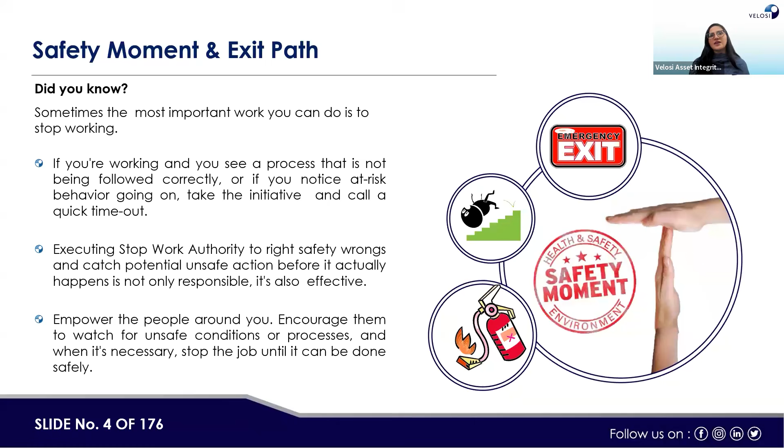So before we begin, like usual, we will have a safety moment. Although most of us are in the comfort zone of our homes, we should be aware of emergency exits, keep a safe distance, and generally take care of those who are around us and also of ourselves.

So covering the agenda, since this is quite a technical subject, we will touch only the key theoretical and practical aspects of conducting fire and explosion risk assessment, FERA study, for oil and gas facilities. In this limited two hours, we request you all to follow along with us and keep asking questions to help us make this session as engaging as possible.

So let's begin, I'll start with Velosi's introduction, a brief intro and overview of what we do. Velosi is a leading global consultancy firm that provides asset integrity, HSE engineering, and software development services to clients in the oil and gas, energy, power, and petrochemical industries around the world.

We also have our in-house proprietary software, Whale Plant, an industry-leading SAP-certified complete asset integrity solution software, currently being utilized by oil and gas giants such as ADNOC, Dragon Oil, TANUP, BSR, etc. Founded in 1982 in Malaysia, Velosi Group was then acquired by Applus Spain in 2011. With above 43 years of experience, we have expanded our footprints in more than 86 countries so far, offering a full range of specialized consultancy services tailored to the energy industry needs. Here is a map that shows our worldwide existence.

Assalamu alaikum, good day everyone. This is afternoon, almost 2:15 here in Abu Dhabi, and I know it's a late evening in the Far East, Malaysia, and morning hours in Europe. So many people are attending in various parts of the globe.

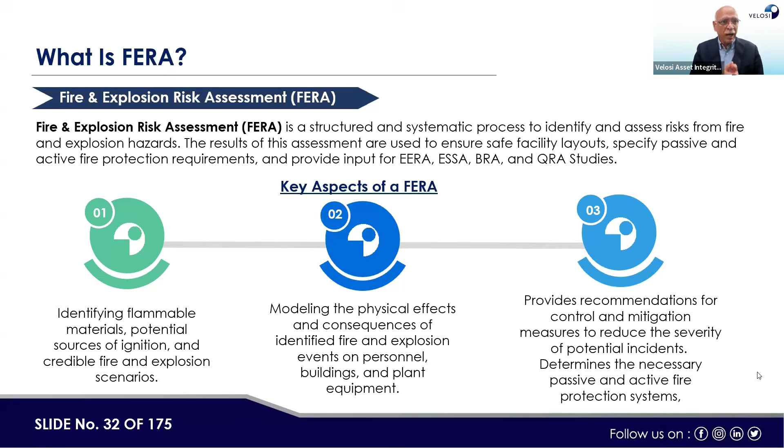Once you have output, it provides recommendations and mitigation measures on how we can minimize risk. We cannot eliminate fire and explosion risk entirely. Once you are dealing with hydrocarbons, they can burn, which requires three things: hydrocarbon, oxygen, which comes from air, and the third element, which is the ignition source. If an ignition source comes near hydrocarbons once they are released, it can cause fire, and fire can convert into an explosion. This is a real risk for us, and we need to manage it.

Now, in a normal aspect, why it's important and how we do it: hazard identification is important. Then assessment, how big is the impact, then how we can reduce the risk, what protection measures we can take, and how we can further improve. All these aspects are important.

Why is fire and explosion risk assessment important? Two examples I gave in the beginning: one fire in Chevron refinery in California, America, during the first week of October, and second, a fire that took place in the Dumai refinery of Pertamina. That is also another example, a reminder for us that this risk is real.

Another example: in the Gulf of Mexico, there was a rig, there was a blowout, and that blowout caused a big release of hydrocarbons, and there were 11 casualties. Now, why did it happen, and how could it have been prevented by a good FERA implementation?

There were poor well integrity checks. Then there was poor blowout preventer maintenance. Then there were gas leakages, and there were ignored signals or alarms by the operators.

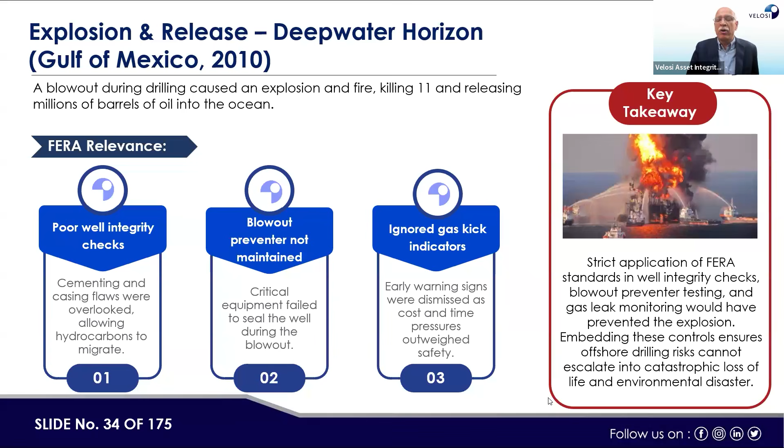So what's the outcome from our presentation point of view? A strict application of FERA standard in well integrity checks, blowout prevention, preventer testing, and gas leak monitoring would have prevented the explosion. Embedding these controls ensures offshore drilling risks cannot escalate into a catastrophic loss of containment or affect life and property.

Another explosion took place in China, Tianjin, in 2015, where ammonium nitrate and chemicals caused a massive explosion, killing 170 people, and there was damage to thousands of buildings.

So what were the causes there? Unsafe storage practices, poor segregation of chemicals, and ineffective audits. FERA also gives recommendations that there should be proper segregation and storage rules which should be followed, and segregation is mandatory. It should also be checked if all chemical storage handling procedures are being followed strictly. So FERA provides guidelines with those respects.

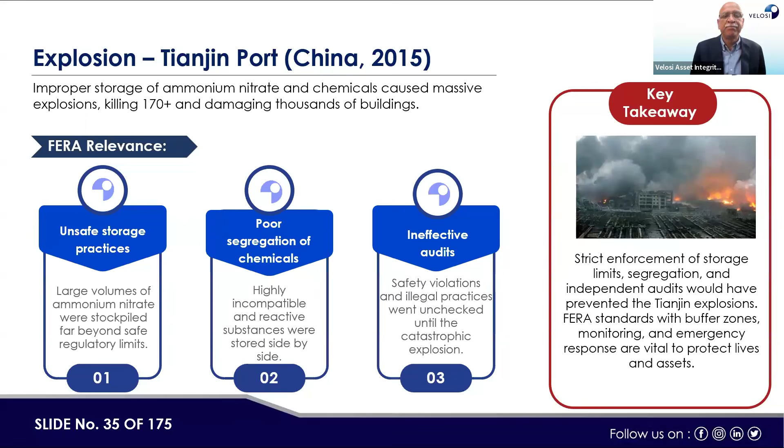Piper Alpha is a notorious incident which occurred in the North Sea in 1988, which caused the deaths of 167 people, and the full platform was also lost. As a result, the concept of the safety case was implemented or initiated by HSE UK.

In this case, the permit to work system was weak. Then isolation was also weak—there was a valve removed, but the process was started despite that. Evacuation systems were also weak. All these aspects could be fairly improved if FERA studies are done and the recommendations are implemented as a serious effort.

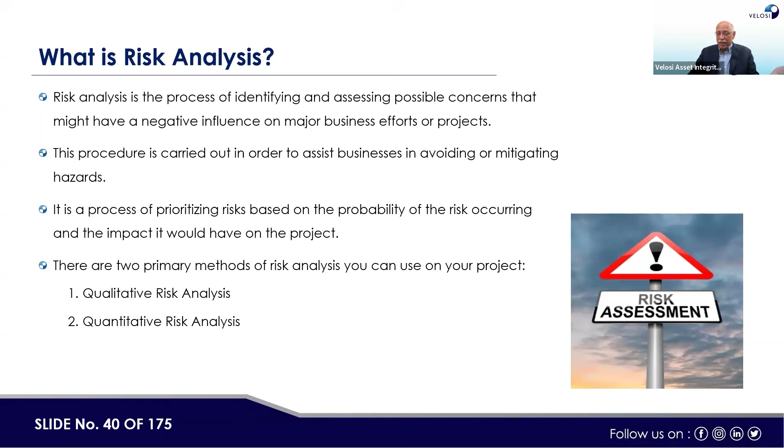But risk is still there and it has to be assessed. Risk can be assessed by two methods: one is qualitative, which is mostly judgmental, and the other is quantitative, which works with numbers - probability of failure calculated by numbers, frequency, and effects, and consequence also quantified, like we do in QRA, FERA, and BRA.

So how did this history of risk analysis start? This is something we see happening after World War II, when the concept of risk assessment came into picture. In the 1950s, companies turned to risk management as an alternative to extensive insurance, focusing on protecting against pure risks. Then from 1970 to 1980, companies adopted financial derivatives as a key instrument to strengthen and expand risk management practices. From the 1980s onward, formal risk assessment standards, practices, and software were adopted by the industry, and now it is part and parcel of every design aspect of the plant.

So, regarding benefits - element-wise, there are three elements in risk, as I said earlier. One is the probability of failure - first identification of hazard, then what could be the probability of occurrence, and what could be the quantification of the effect, the consequences. Then, if you multiply both in quantitative risk assessment, we can understand the concept of risk.

Sometimes we try to minimize the consequences, sometimes we try to minimize the risk by taking preventive measures. In this way, risk analysis gives us steps like what are the causes, and how the causes could be minimized, neutralized, or completely removed. Consequence-wise, we can minimize impact through having lesser inventories, proper segregation, and so on.

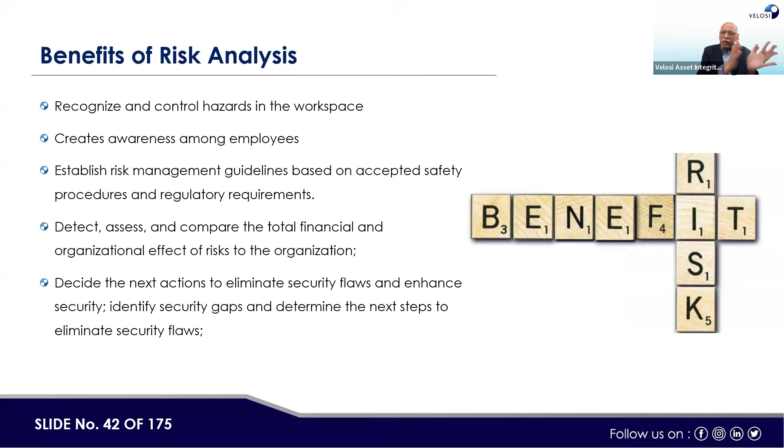The benefit of risk assessment is that once we know what may go wrong, if we focus on the probability side or the consequence side, it gives us better risk management approaches. If we can manage the risk, the probability of fire could be eliminated and the effect of fire could also be minimized if it occurs. So these are the general benefits of risk analysis.

Now, how we do it in general, in risk, as I said earlier, we identify hazards, consequences, and risk as the first step. Then we analyze the risk, like what is the driver of the risk, whether hazard side or consequence side, since risk is a multiple. We scale risk up or down, like high critical, medium critical, low critical, or high risk, very high risk, medium risk, low risk, or negligible risk - various categories. Then we analyze those risks, focus on their drivers, and see how those drivers could be controlled. Based on those drivers, we try to develop a risk management plan.

Then we implement the risk management plan in actual practice and monitor those management aspects. For example, if we have an alarm management system in the industry, in the plant, if there's a deviation in the process parameter, there would be an alarm. If that alarm is not attended by the operator, the next step could be a trip, an interlock may act, or there could be an accident on the plant. So we know the process safety effect of that alarm, the process safety time for the operator to act, and what he has to do. In this way, we can monitor and manage that particular risk, as in the example I just gave you.

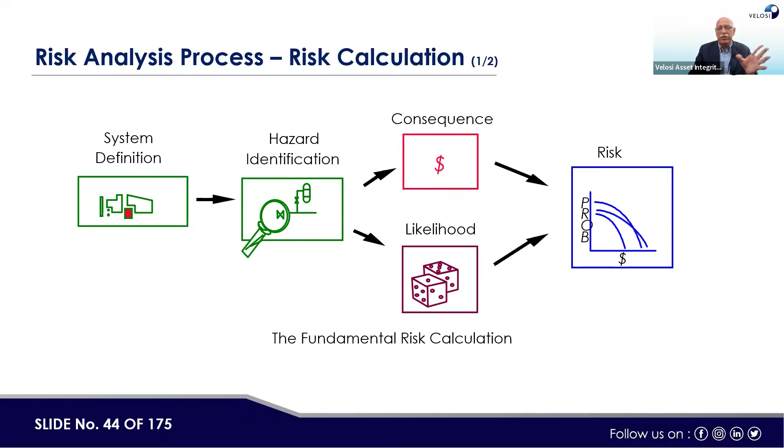Now, just to see how an insurance company uses risk calculation as one of their decision-making tools. For example, one insurance company insures 1,000 cars, charging USD 1,500 per year per car, so total revenue is $1.5 million. Now, if everything goes as per their calculation, 50 cars out of 1,000 get into full accidents, and they end up paying a price for each car, let's say $15,000, so they pay $750,000, which is less than or half of the 1.5 million.

But if this number goes double or more than 100, the insurance company would be in loss. In this way, you can imagine the effect of risk in terms of numbers - what premium the insurance company should charge per car on average. Similarly, if there's a maximum number of incidents per the previous track record of the last 10 or 20 years, they can say this has been the trend. If there's no hurricane, no weather abnormality, it would be safe for the insurance company to run their business. So this is the demonstration of risk in terms of numbers.

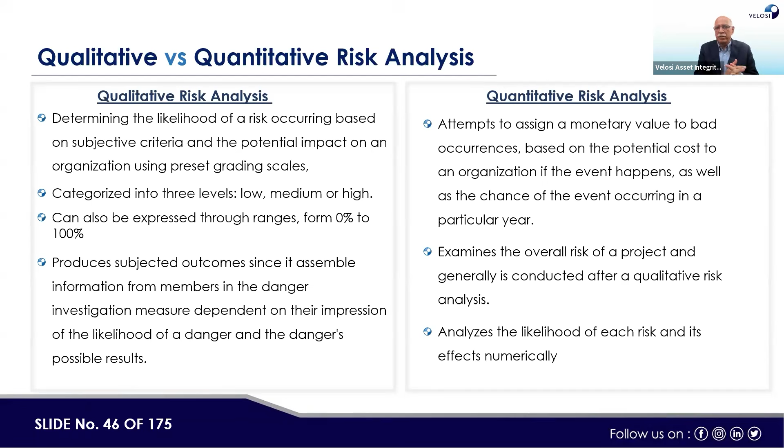And sometimes there's also something in between - semi-quantitative risk analysis. One is qualitative risk assessment, second is quantitative risk assessment, and sometimes there could also be semi-quantitative risk assessment - half number, half judgment, or some number, some judgment. So all three approaches are available in the market and are used for risk assessment, because sometimes it's not easy to quantify risk always in numbers, as information may not be available. So in that scenario, we use semi-quantitative.

In quantitative risk assessment in general, there are three studies that we are using: QRA, BRA, and FERA. Output of these three studies is utilized under ESSA and EERA. ESSA is Emergency System Survivability Assessment, and EERA is Evacuation, Escape, and Rescue Analysis. These two studies are basically subpart of QRA and FERA. Now we are discussing the three main studies: BRA is Building Risk Assessment, QRA is Quantitative Risk Assessment, and FERA is Fire and Explosion Risk Assessment.

So we need to understand why these three studies are done. In all three studies, we use the software FRED and SAFETI by DNV, and the same model, but with some input parameters changed a little bit, and then the output receptors or assessment aspects are changed. The same model is used to execute all three studies in series, not in parallel, because the same model is utilized with a little bit of adjustment.

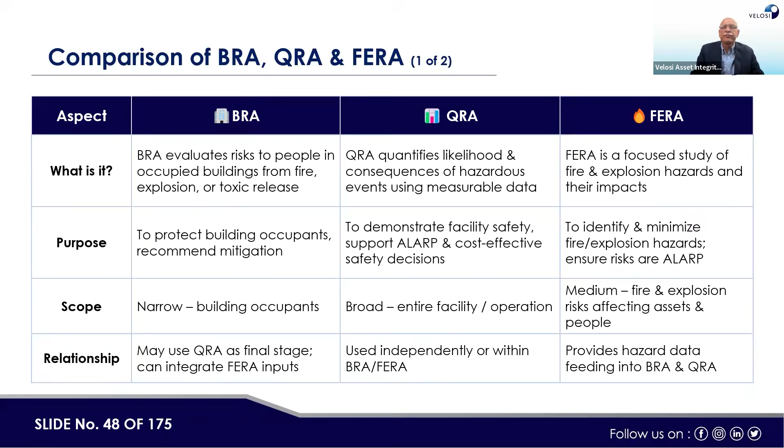In terms of process, all three stages include hazard identification and consequence modeling — in BRA, QRA, and FERA. Then detailed QRA, if needed, is done or may not be done, depending on the case. Then comparing against acceptance criteria — basically risk evaluation in terms of fire and explosion modeling outputs.

BRA reports include hazard occupancy data, safety recommendations, numerical risk values, risk contour maps, and ALARP justification. Here, for QRA and FERA, it covers fire protection, safe layout, and mitigation measures.

In terms of application, BRA assesses the safety of occupied buildings, in compliance with API 752. QRA is used across the facility life cycle to justify safety decisions with an acceptable IRPA risk. FERA forms the basis for fire and explosion protection systems, supporting BRA and QRA. So this is just to give an idea — when we talk about BRA, QRA, and FERA, these are interrelated, and the same information and same model can be used, but with a little bit of focus on different outputs.

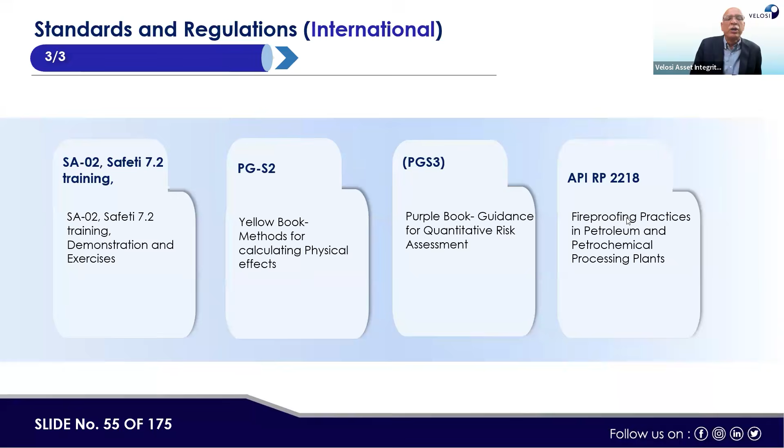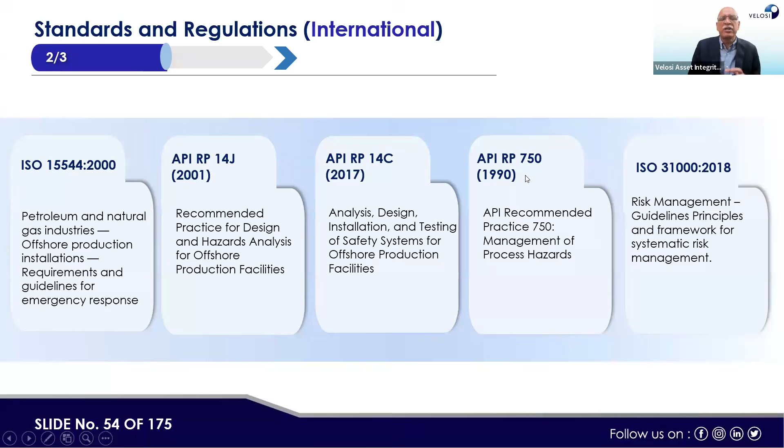API RP is very, very important. If I have to say, some are more important - NFPA 30 is more important, right? Then ALARP guideline is important. Regarding BRA, 752 is important. But for normal risk concept, it's 750. So some standards are important, some can be used as supporting documents.

Because we cannot bring risk to zero, risk would be there, but it should be as low as reasonably practicable. So to understand the concept of risk and how we can manage it, the concept of ALARP framework is very important to understand.

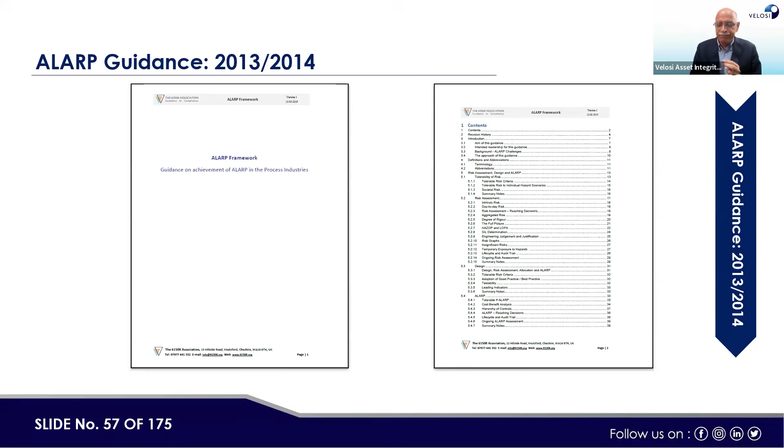This is one of the key standards of NFPA, because in hydrocarbon or any process industry we are running our storage, NFPA 30 provides very important guidelines regarding safety data sheets, their diamond, their risk reactivity, oxidation aspects, and so on. So this standard is very, very important for you to keep nearby.

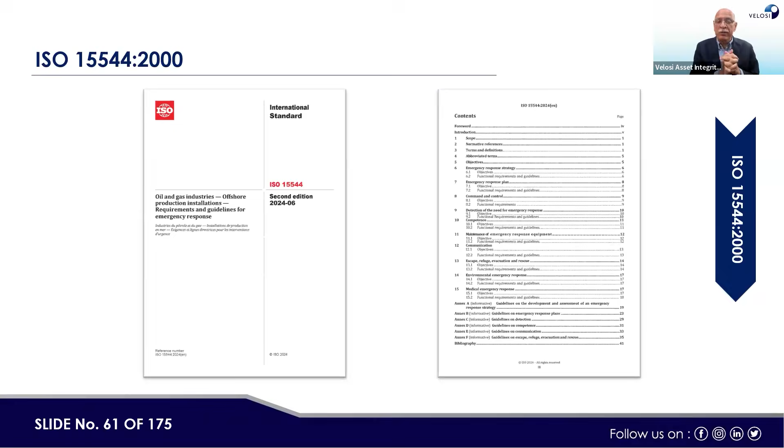Then RP 752, which is basically for building safety. Then ISO 15544, which is basically oil and gas offshore production installation requirement and guidance for emergency response, ERP. In case a fire occurs, how to behave, how to react, whether the organization, whether the leadership would be ready to take control of the situation.

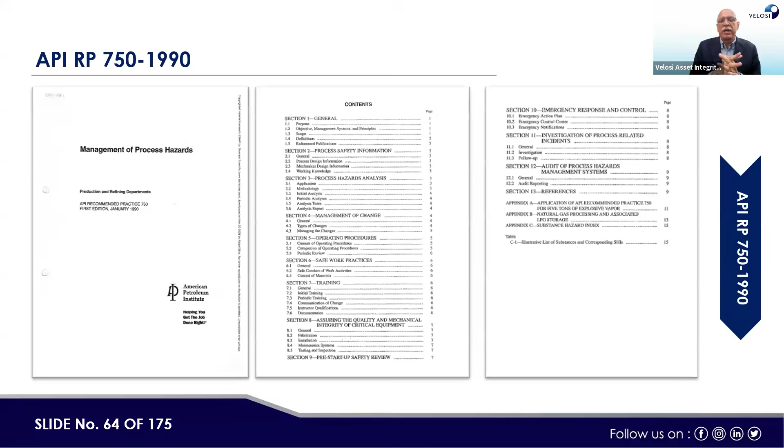Then API 14J, it is a recommended practice for design and hazard analysis of offshore production facilities. Then 14C, analysis, design, installation, and testing of safety systems for offshore production facilities. Then management of process hazards, normal risk management aspects - risk identification, risk assessment, and management aspect, general guideline.

This is a risk management guideline covering how we control probability and consequence, and how risk could be minimized. These are general guidelines, not a solution for everything, showing what aspects we can apply and how we can operate our facilities within an ALARP region.

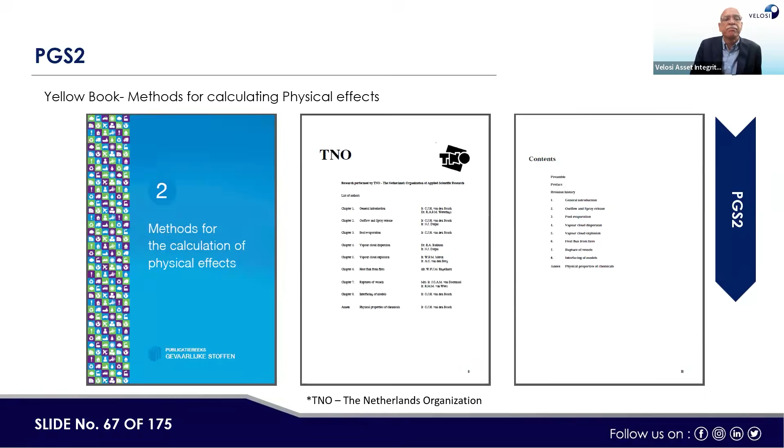Since we are based in Abu Dhabi, most of our studies are across the whole region, but the protocol used by ADNOC, we appreciate, since we also work with Saudi Aramco, Qatar Petroleum, OQ, KJO, or KOC, all the Middle East countries. The protocol followed by ADNOC is one of the most robust ones. They have standards to carry out the full pattern of various HSE studies and COMAH, control of major accidental hazard.

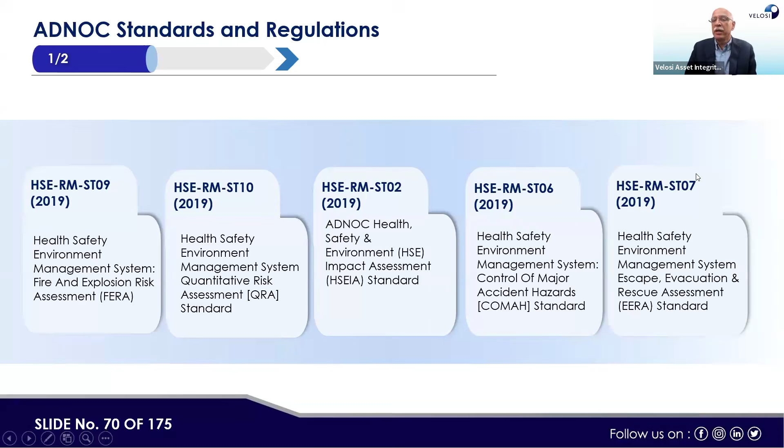ST09 is basically for FERA, and ST10 is for QRA. ST02 is the general HSEIA standard. ST06 is how to prepare COMAH, which would be the safety case in future. ST07 is the EERA standard. ST01 is the ADNOC HSE risk management standard. ST08 is the ADNOC emergency system survivability assessment standard, ESSA. And ADNOC CFD dispersion and explosion modeling standard is ST14.

In this way, ADNOC has helped a lot. We feel very much guided and appreciated, because we don't need to go to other international standards while working with ADNOC. In other countries, like Qatar Petroleum and Saudi Aramco, they also have standard guidelines, but not to the extent ADNOC has produced. So ADNOC is helping the region, encouraging other companies also to follow the ADNOC approach.

Then CFD dispersion modeling, which is ST014. Now I will start with the FERA case study. In this study, at the last stage we will have questions and answers. We know it could be a bit boring in between, so we have a few questions in between.

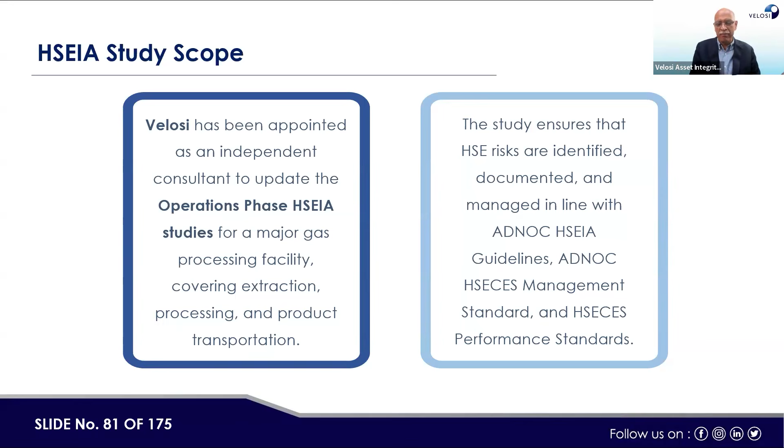We have mixed up the various studies and also changed the data, so any result you see will not reflect any particular asset of ADNOC. This is a mix up to protect the copyrights of ADNOC. Since we are presenting based on ADNOC standards, you may perceive the study is for ADNOC, but it's a mix up. This is important to clarify, otherwise it can misguide people questioning the numbers. So numbers are also changed, including the symbolic number. This is my big caveat and qualification, sir.

The objective of HSEIA studies or safety case studies normally carried out is compliance with HSE regulations and standards of ADNOC, major accident prevention aspects plan, health, safety, and environmental hazard identification and assessment, risk managed with suitable measures and critical equipment in place, on-site and off-site emergency plans established, and risk reduced to as low as reasonably practicable, safeguarding life, property, environment, and business. These are the 6 objectives of any HSEIA study or safety case.

Now there are various deliverables: hazard identification (HAZID) workshop report, BowTie workshop and report, HSECES/SCEs register and performance standards, update of integrated QRA, fire and explosion risk assessment, emergency system survivability assessment study report, escape evacuation and rescue assessment report, toxic gas dispersion modeling report, control of major accidental hazard report, review of existing company HSEMS system, environmental impact assessment report, occupational health review and assessment report, and HSEIA dossier.

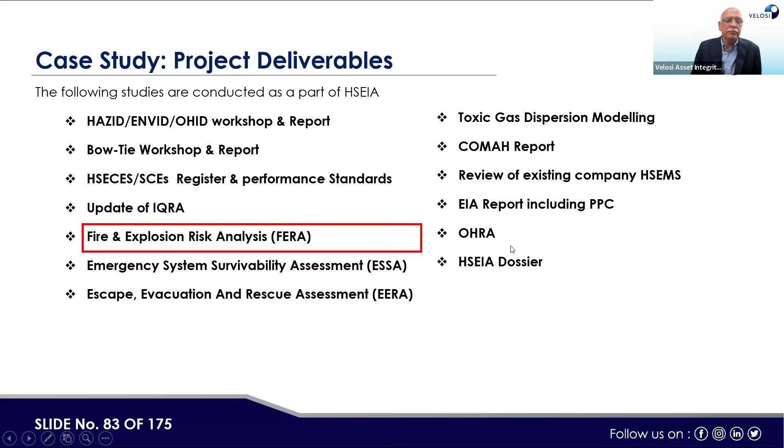The current FERA study scope is limited to updating the existing FERA report based on the gap analysis conducted as part of the current HSEIA. The battery limit of the facility studies as part of FERA are gas system, gas plant, sulfur station, and pipelines.

Under FERA study objectives, we have to identify the accidental loads, adequacy of fire protection system, and risk reduction recommendations. These are 3 major aspects we are going to cover under this study.

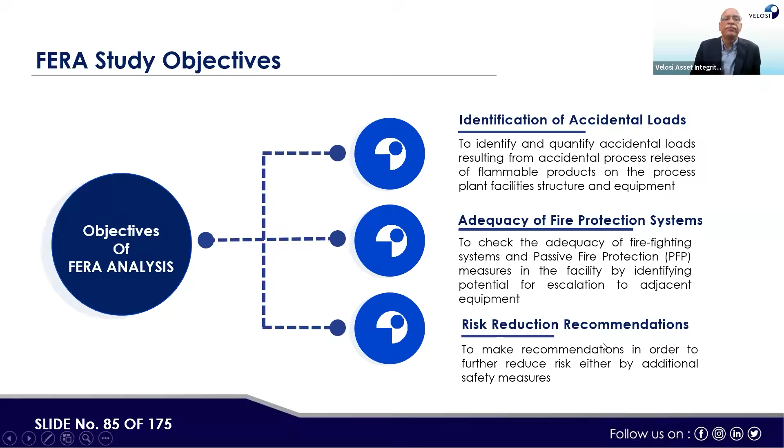Now, again, to keep you awake, there's one question. What is the full form of HSEIA?

First option is health, safety, environment impact assessment. Second is hazard, safety, environment and inspection audit, health, safety, emergency incident analysis, human safety and environmental impact audit.

So there are answers coming in. Good, mostly are right, and the answer is A. We added this question so we can engage you during the discussion, otherwise people may sleep because it's a lengthy presentation and sometimes boring too.

So FERA study deliverables: like we said for HSEIA, there are various deliverables, and in FERA also there are detailed deliverables. Core deliverables include frequency of overpressure levels, frequency of thermal radiation levels, identification of loss of containment scenarios, consequence modeling results, recommended additional safety measures for further risk reduction, fire and explosion risk reduction measures, and detailed deliverables also add further engineering considerations as a recommendation given by the FERA study.

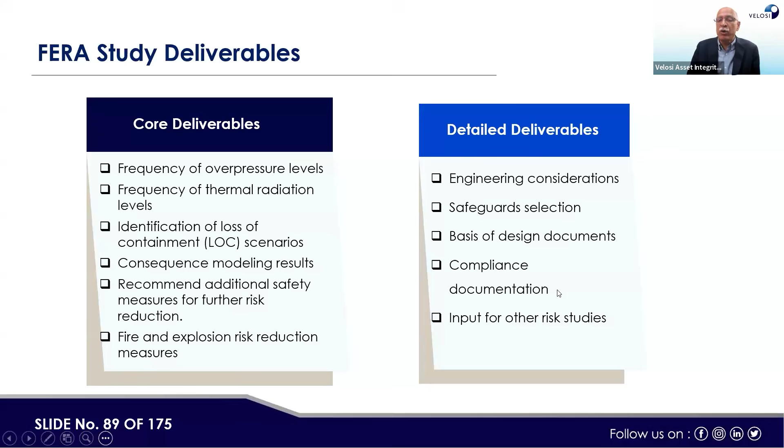Safeguard selection, if we need to identify and add, then basis of design documents, compliance documentation, and input for other risk studies like BRA and QRA, ESSA and EERA.

Basic data requirement: normally we need PFDs with heat and material balance, P&IDs, plant layout, and 3D model. Once we do that, we need to identify isolatable sections. For isolatable sections, we need to calculate inventories, their compositions, and operating conditions.

We also need to know what kind of safety system, existing or being designed, is in place - what kind of fire and gas detection system, what kind of emergency shutdown system, what kind of active fire protection system, and what kind of passive fire protection system is there.

While modeling the system, we consider parts count, frequency calculations, likelihood calculation, ignition probabilities, and equipment failure rate, which could be plant specific or taken from OREDA or similar sources.

Then consequence data, taken from the inventory side, could include thermal radiation and fire aspects, as well as escalation scenarios, plus toxic elements within the process which could have other effects like H2S and SO2 or ammonia. Those aspects are also considered.

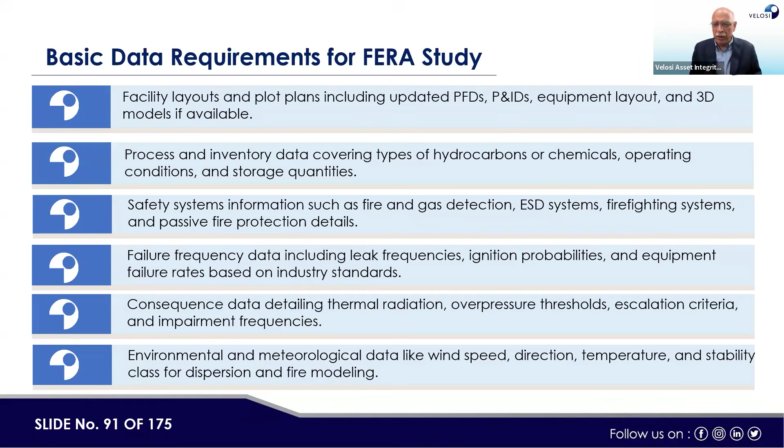So this way we try to do FERA, QRA, and BRA. Just to understand, when we are doing this, we should know what the facility is. First, when we are going to do FERA, QRA, or BRA, what is the process plant? What kind of service is there?

It's a hydrocarbon with H2S, or it could be an ammonia plant. In ammonia, first we bring in methane, we are preparing CO2, and also taking nitrogen, and the CO2 and nitrogen are combined to make urea, and so on. In this way, as we understand the process, whether it's a chemical plant or a hydrocarbon plant or refinery, we should know the process and their units so we can imagine what impacts there could be.

First there should be a normal hazard identification, and people should know what can go wrong. Then accordingly we quantify them using software. So the first thing is we should understand what the process conditions are, what process is being done by that facility, what is input, what is output, what kind of reactors are there inside, exothermic or endothermic, then accordingly effects would be there.

Like the fire which occurred at Chevron, that was in one of the SMX units, which is an exothermic reactor, and there is a probability of fire if temperature goes out of control because it's exothermic. So it's very important to maintain the cooling system or safe shutdown of the facility if there is any abnormal situation. It's important to understand the process of the facility, its composition, and the sensitivity or reactivity of the chemicals which would be released in case of leakage or rupture.

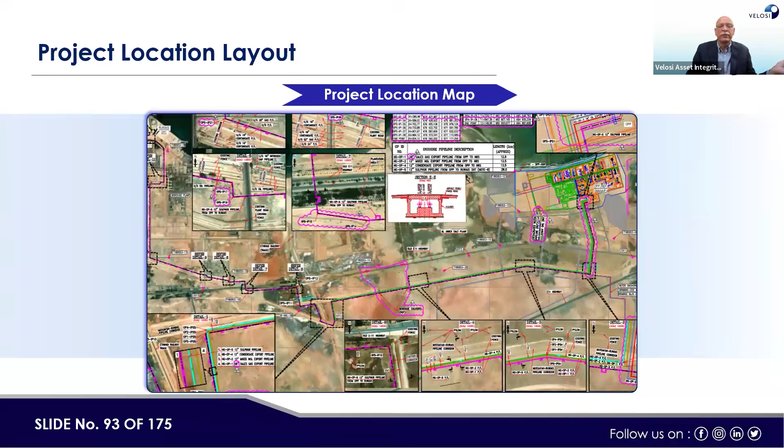FERA approach — my part is the approach part, and the result part would be presented by Harim.

FERA methodology and assumption register, that's the first thing we do. Then selection of failure case scenarios or isolatable sections we mark. Then physical parameters selection and inventory calculations. Then frequency assessment — we take the hole size, failure frequency assessment, ignition probabilities, event frequency assessment. Then on the consequence side, source term modeling, physical modeling effects, then impairment criteria, and consequence impact assessment.

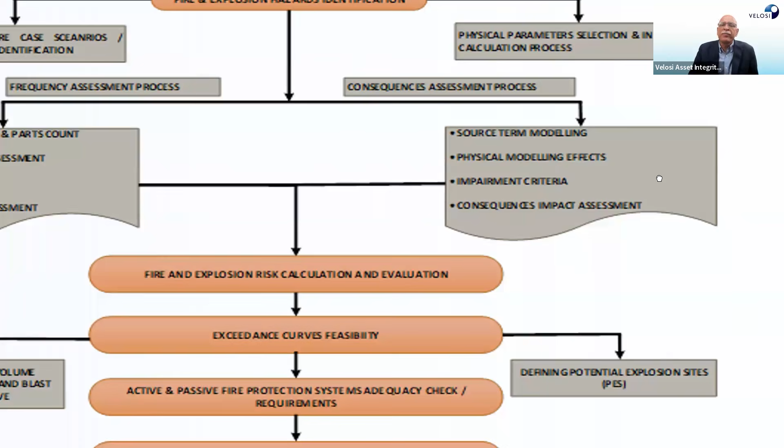If you see this, it looks like there are many calculations since we are doing QRA around every day. So I see them step one: take the PFDs and P&IDs, mark isolatable sections, or in BRA we say inventory groups. The inventory group is like, if there would be any leakage or rupture in a particular section of the plant, whether the whole inventory of the plant will go into that leakage route, or there would be only limited release within the ESD systems' area.

If there is an emergency at the plant, a leakage, then we will trip the plant — the inlet will close, outlet will close, the BDV, blow down valve, will open to flare, and ESD will shut down. So in that area, there is a limited inventory which will go out on the leakage side.

And this probability of happening is being done like, what is the number of flange connections there? What is the diameter of the pipe? What could be the possible hole? Normally we are considering 4 or 5 scenarios, for example 5 mm hole, 25 mm hole, 100 mm hole, or full rupture.

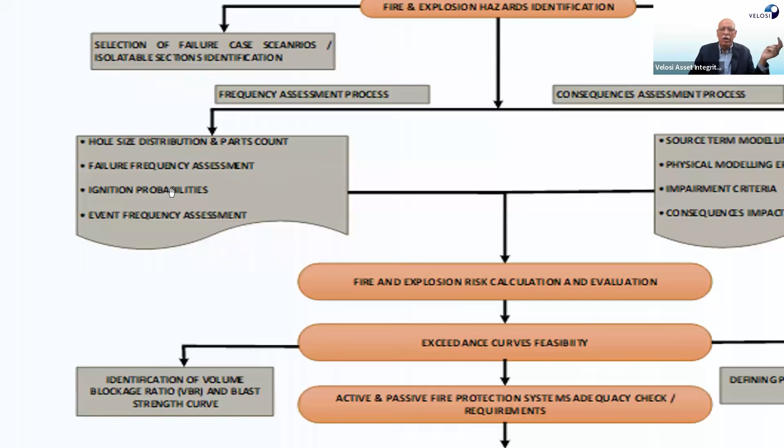And similarly, inventory is coming from the isolatable sections. If we try to do it practically, it's not so difficult, but if we try to understand from this presentation, it would be nearly impossible to handle. But this gave you an idea how the FERA is being done, or the same approach. Up to these two parts, it is same in QRA and same in BRA.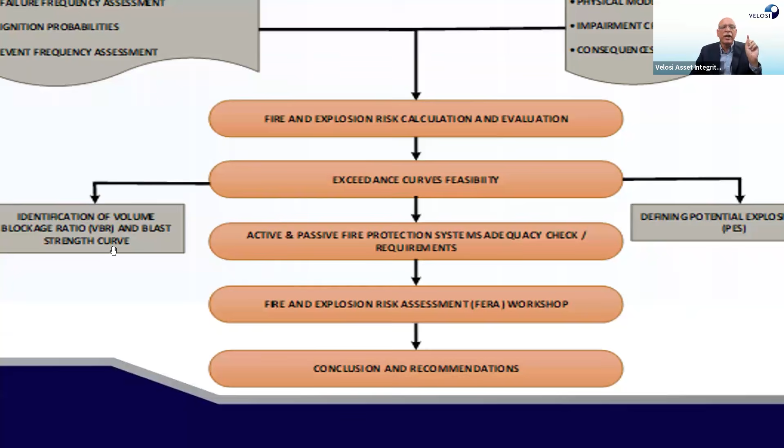Then do fire and explosion risk calculations using the software. Then exceedance curves feasibility, like where the impact would be. Identification of volume blockage ratio, VBR, and blast strength curve. Then determination of the potential explosion sites, PES.

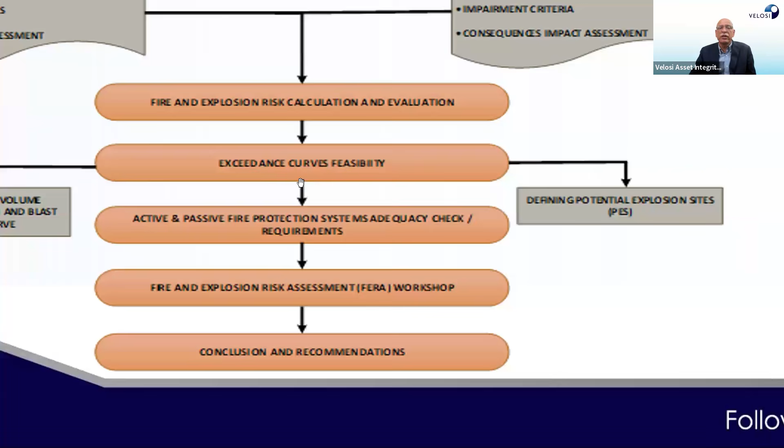If we want to take a platform, structure, or building nearby, we mark them as a PES, potential explosion site, and then accordingly we see the effects on those particular nearby receptors, right? Then active and passive fire protection system adequacy check requirements. Then fire and explosion risk assessment. A FERA workshop is also done once we have the result, right? Then conclusion and recommendation. So these are the steps we normally do.

Here, the same steps. I'm repeating, in case somebody wants to use this presentation for actual working, they can do so. First, hazard identification, normally coming from a hazard workshop.

So failure cause scenario would be modeled by software, but we have to take isolatable sections. The people who are familiar with RBI take inventory groups in accordance with API 581. These isolatable sections in QRA and inventory groups in RBI, risk-based inspection assessment, are more or less the same.

Consequence assessment is done by the software. Frequency analysis is done first outside, by parts count, taking the frequency of that particular object type, and that is fed into the software.

Similarly, we also add probability of ignition, for example firefighting, fire and gas detection system, ATEX compliance with all electrical instrumentation items, and all the heat or hot spots in the plant are managed.

And then we do fire and explosion risk assessment, exceedance curves feasibility, and then we say what kind of active and passive fire protection system is there. If we need to improve that, then a fire and explosion risk assessment workshop is done to see that everything is within the ALARP region.

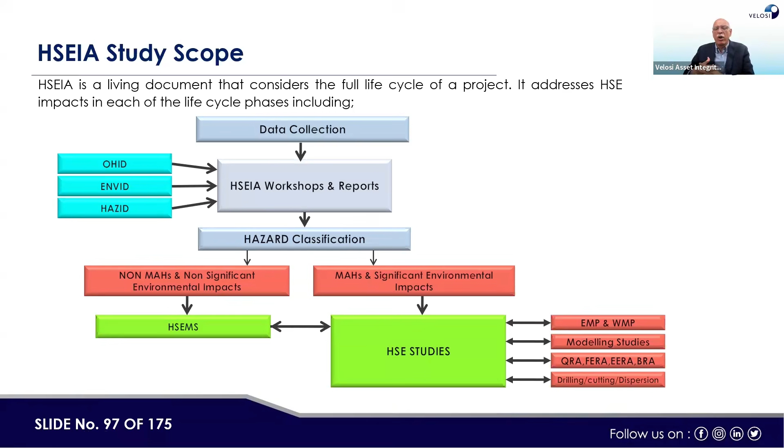So same aspect, little bit more detail: we have OHID, ENVID, HAZID, same workshop, classified the same. Then studies mean either ORA, EIA, air and noise monitoring, QRA, FERA, SIMO, MOPO, BRA, ESSA. These studies could be shown this way also.

And another way of control of major accidental hazards, I don't want to confuse all of you, but if I go back: OHID, ENVID, HAZID workshop, only workshop, and this will classify MAH, non-MAH. Two things done, two things only, easy.

Then non-MAH and insignificant environmental impacts would be covered by HSEMS procedures. But MAH and significant environmental impact would require various HSE studies, which are being done, all this. And then it goes to the COMAH report.

Now, under this COMAH report, everything is combined, control of major accidental hazard, COMAH report. Major accidental hazard, MAH identification, is done by hazard workshop. Then major accidental hazard MAH assessment is done by these studies: QRA, BRA, FERA, ESSA, EERA, and H2S zoning studies. This is done.

Now, then in MAH, we also do bow-tie. Under bow-tie, we make HSECES or FT register and performance standard, which is done separately for feed stage, EPC stage, and operation stage, and HSE critical activity register and registers are identified.

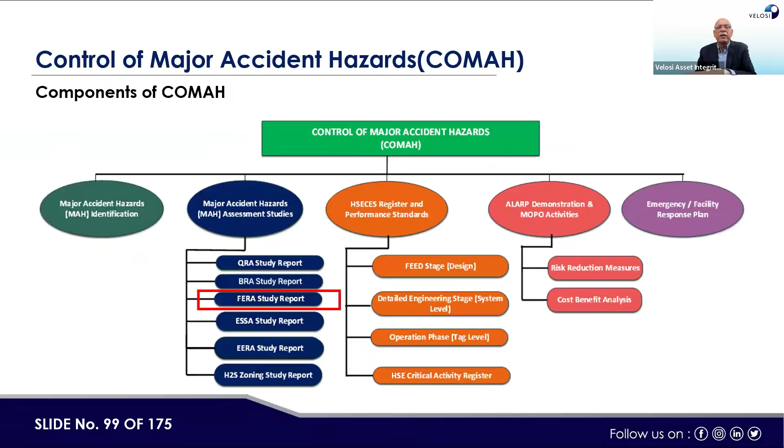Our approach is basically the same, only now we call it the actual case. Here, for building and hazard identification, we carry out a hazard identification workshop where a term of reference is prepared, then a pre-populated hazard worksheet is prepared, then the hazard workshop session is done, and then we prepare the hazard workshop report.

Here, for example, hazards related to safety, hazards related to environment, and hazards related to health are identified. MAH, major accidental hazards in terms of safety, like one or more fatalities, are also identified. Then identified hazard impacts are rated based on the ADNOC risk matrix and ADNOC risk management standard. These are to be matched.

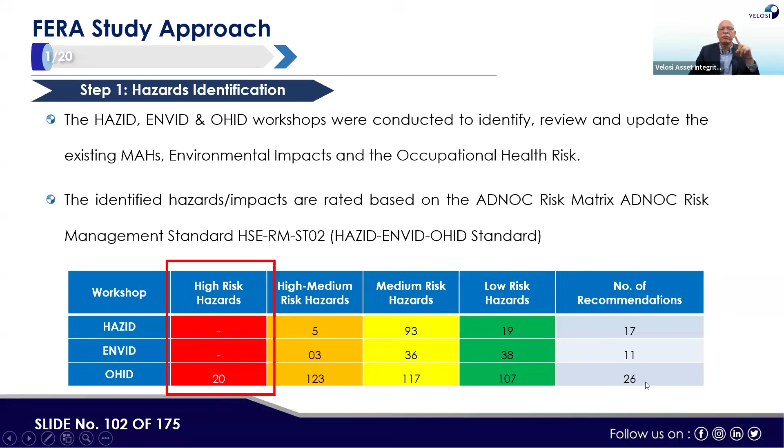Here we've changed the numbers, but we're showing how many high hazards exist in this particular facility. For example, not high risk otherwise, but OHID-wise there are 20. Then there are high-medium risk hazards: 5, 3, and 123 on the health side. Medium risk hazards are 93 and 36, and low risk hazards are 19 and 38. The number of recommendations given for each kind of hazard are 17, 11, and 26 by the workshop attendees.

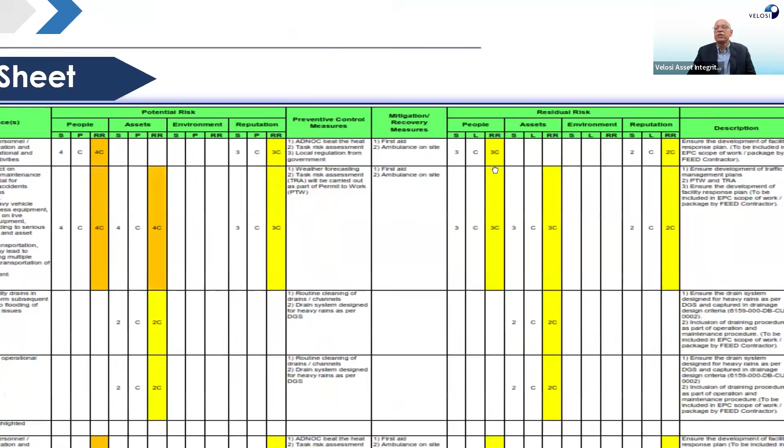Here is a sample worksheet where we try to see the hazards, node by node: threat, top event, consequences. Then there's potential risk, preventive control measures, and mitigative recommendations, then accordingly residual risk, and the action and recommendation as a result of that worksheet we prepare. This is just one sample; there are many sheets.

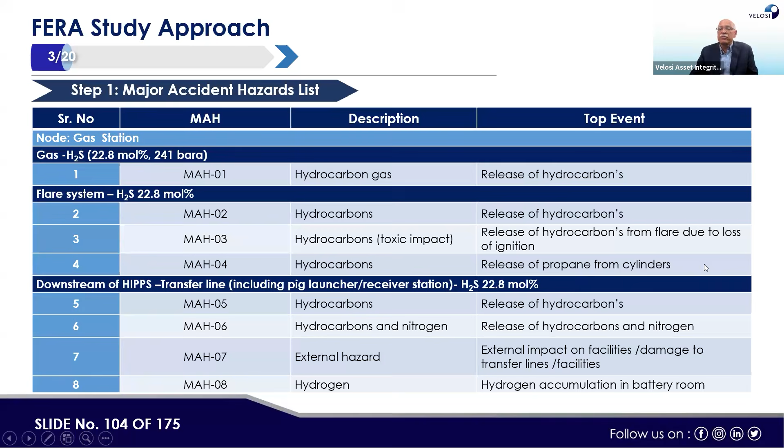Then the major accidental hazards that come out of the workshop - here are a few examples. Gas with H2S at 22.8 mole percent and 241 bar pressure, then the flare system with H2S 22.8%, then downstream of HIPPS, the transfer line including pig launcher receiver. These are examples of hazards, MAH-01 to 08, with top events like release of hydrocarbon from flare due to loss of ignition, release of propane from cylinders, release of hydrocarbons, and so on.

Now, for a major accident event, we have to imagine what can happen - we know those are the major fires. Remember, there would be a question on this too, I'm just telling you as a guess. These are jet fire, pool fire, vapor cloud explosion, and dust explosion - four kinds of fire and explosion that can take place at the facility.

Now, isolatable sections - how we mark isolatable sections on the P&IDs. We mark the isolatable section within the emergency shutdown valve, emergency depressurization valve or blowdown valve, the remotely operated valve. Sometimes people say we should take a motorized valve, or people say we should not. Then normally closed and locked valves, like fail-safe actions - if the control valves are fail-safe closed, those could also be considered as an isolatable section.

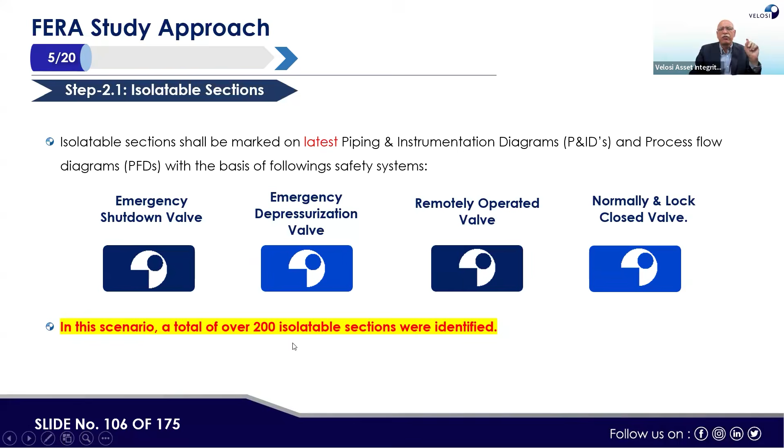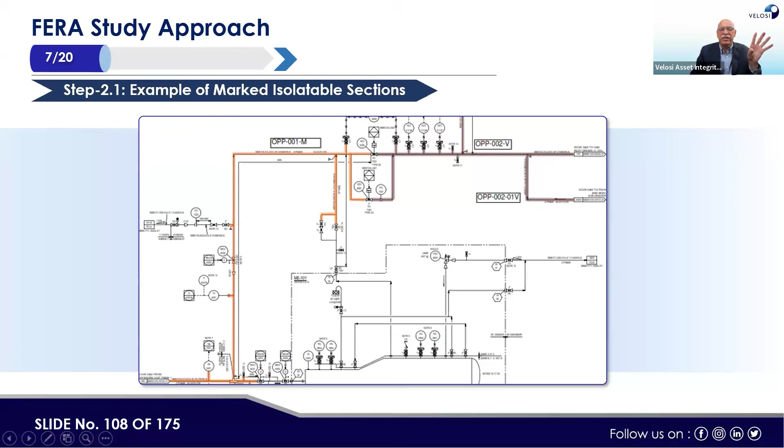Then parts count methodology, like this example we are showing here, all the flange connections. For example, flange connection on the vessel, this flange, this valve, if they're welded will not take. Only flange connections where leak can occur. Other places, we take potential hole in the pipe or equipment, there's separate criteria. So flanges, manual valves, actuated valves, their flanges are counted mainly. Or the manual and actuated valve, their trim or actuator may also leak. So that's one potential leak point.

Then instrument connections, if they are like transmitters, they may also leak. Then release frequency is calculated as a combination, and piping length is taken more than 2 inch as per the isometrics, basically drawings. Here, leak size distribution, like the represented leak size, generally 2 mm, 5 mm, 10 mm, 100 mm, this is the range, but we take this as a representative leak point.

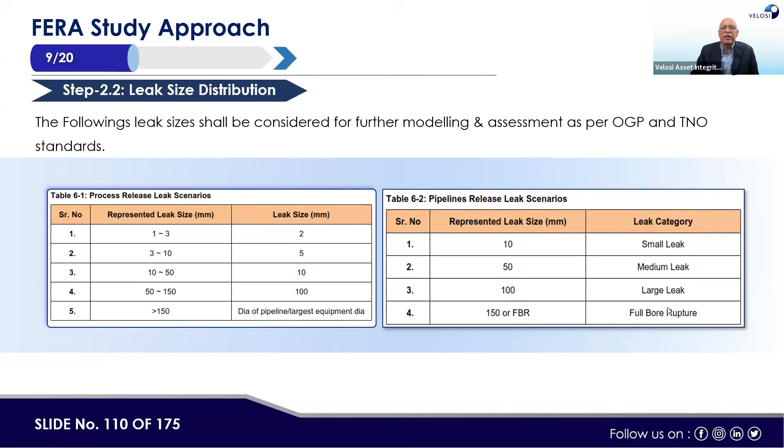Representative leak size, if we take, for example, for small leaks 5 mm or 10 mm, medium leak 25 mm or 50 mm, large leak 100 mm, and there is a rupture or full bore rupture that can take place. So these are modeled in the software, and these features are already available in PHAST and Safeti software.

Then input sheet source term modeling, like here, for each isolatable section, we have to identify the operating conditions, like composition, toxic element composition, and also the density, volume, and mass. The rest of the information will be taken by the software itself.

Here, inventory calculations, both static as well as dynamic. And then also conditions are taken into consideration. For example, if automated ESD and blowdown system is there, then the system would be isolated within 2 minutes. Manual ESD and blowdown, it will take 5 minutes for operator to act. Then accordingly, we have a static inventory, discharge rate into detection and isolation time of the valves. This is the dynamic. The total mass inventory is static plus dynamic inventory.

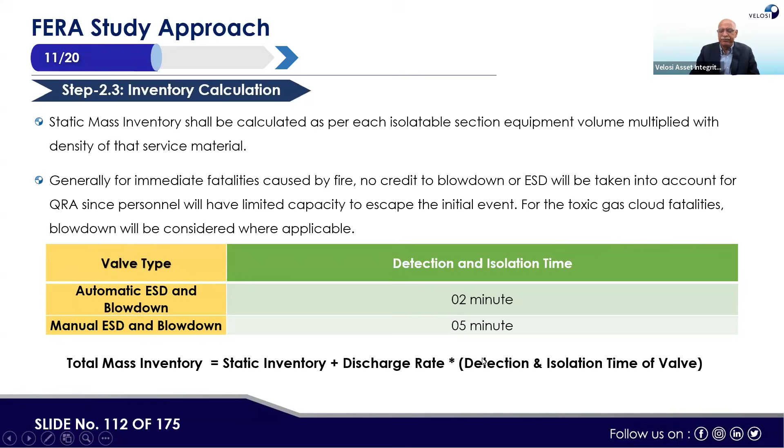Then inventory calculation wise, static and dynamic inventory shall be calculated to identify and assess the physical effects from all the isolatable sections with different leak sizes as per TNO Purple Book. Following leak sizes shall be used for dynamic inventory calculation: small 5 mm, medium 25 mm, and 100 mm.

So this is how we calculate, and this is the main time consuming activity in QRA, VRA, and FERA, because we have to mark all isolatable sections, we need to calculate all the parts count, and we have to make all these calculations, and then your input is ready for the software. So this is the most time-taking activity. If these calculations are done rightly, then we would have more reliable results.

Failure frequency calculations, basically there are generic failure frequencies, then we have to multiply with all these potential leak points like flanges and valves, their trims, their actuators, and then accordingly we calculate what is the resultant failure frequency for any particular isolatable section.

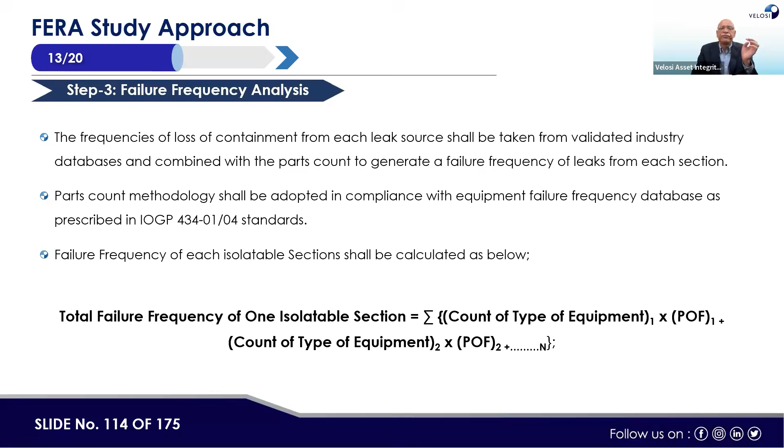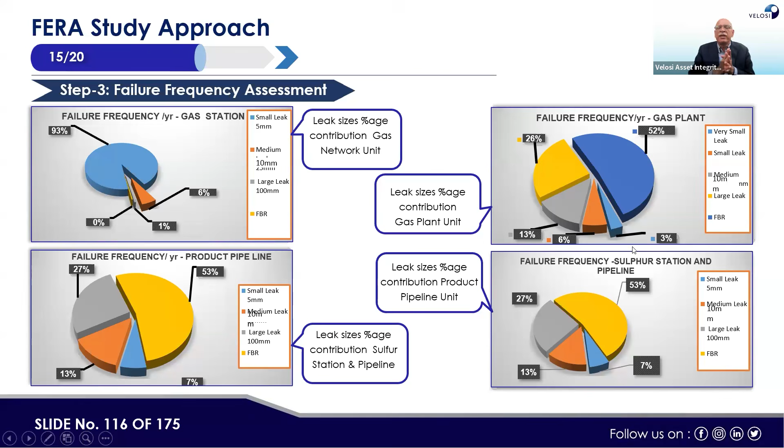Then assessment of what is the contribution coming. For example, small leaks 5 mm, medium leak 10 mm, large 100 mm, full bore rupture. So if you see this contribution, in this particular case, there is no full bore rupture, but here some are there, right? Now, if you see the other side, a failure frequency in the gas plant. So here large leak is there, and full bore rupture is also there. So these are the representation of the various frequencies which are applicable on each isolatable section, gas plant wise.

So people who are not in practice, it would be difficult to imagine, but up to now, things are doable. These are the input data we model into the software, and then the software gives us the result.

Then, from FERA modeling, following results would be extracted from the SAFETI software: location-specific individual risk (LSIR), land use planning criteria, individual risk per annum (IRPA), which is very important, risk tolerable criteria, and societal risk curve outside the boundary of the project, like societal criteria. These are the three major ones.

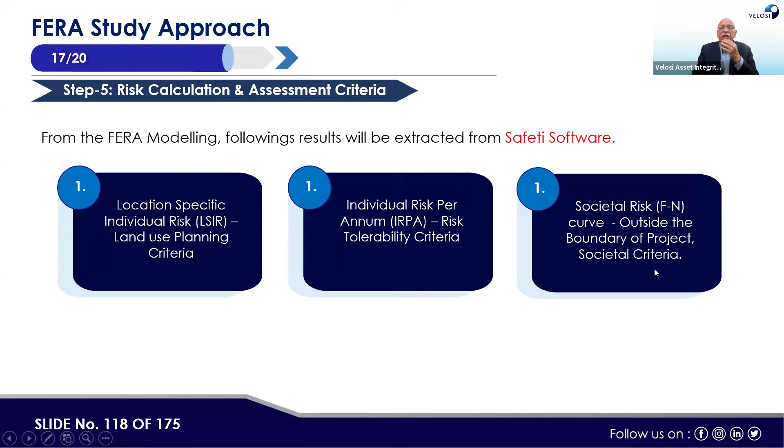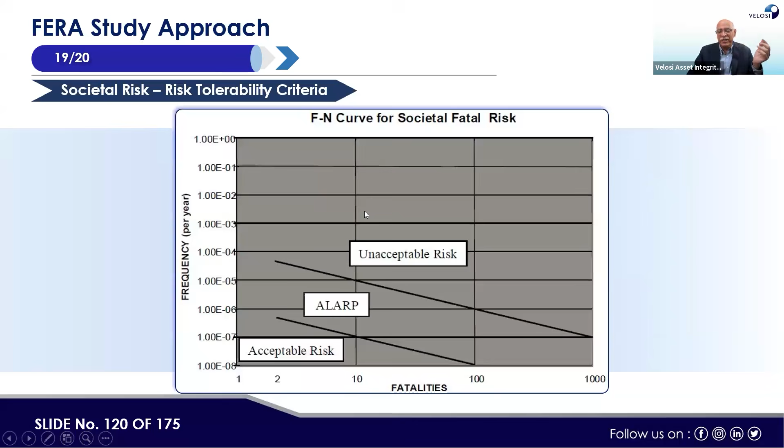Now, just to make you awake, one more question. What is the main purpose of a hazard identification study in risk management? First option, to quantify the probability of failure of equipment; to identify potential hazards early in a project or operation; to calculate financial losses due to downtime; or to avoid compliance with ISO 9001 standard.

So the answer is coming in, people are filling it in, mostly are right. Yes, gentlemen, ladies, please fill your number. Okay good, mostly are right. It means people are participating, not sleeping. So the answer is B: identify potential hazards early in a project or in the operation phase.

Now, we also prepare a FERA assumption register while doing the study. Whatever data we are using, we have to make an assumption register. That assumption register covers maybe 23 activities. What are those 23 activities? One, hazard identification, which is done through a hazard workshop. Then isolatable sections and failure cases, how we will be making those - this is part of the assumption.

The process parameters may not be 100% matching with the heat and material balance, so sometimes we have to adjust some numbers. Inventory assessment - we do those calculations, and they have to be right and recorded. Then isolation and blowdown time has to be recorded, like whether ESD is 2 minutes or 5 minutes. Parts count, how we are doing that, should be part of the assumption register. Leak sizes and hole size distribution, as we will be using them. Failure frequency, how we'll be calculating it.

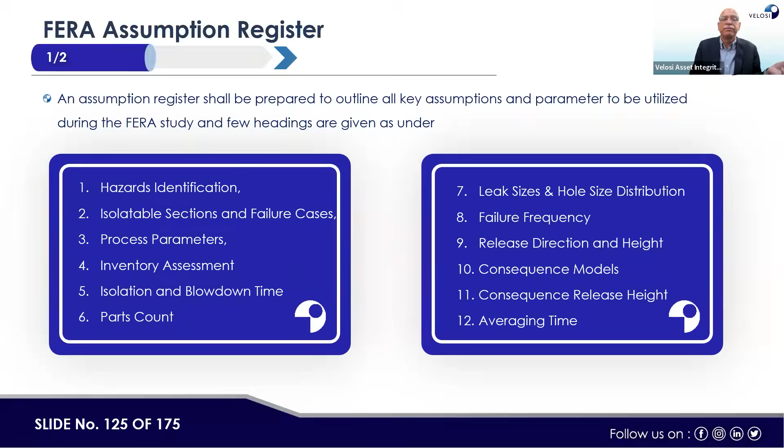Then release direction and height of the elevation point of view on the plant. Then consequence model, consequence release height. Then averaging time, like 0 minute, 5 minute, 10 minutes. Then we have a consequence modeling endpoint, human vulnerability, building vulnerability, occupancy and manning, like how many people are there in a particular time. Then area division risk ranking point, escape and evacuation risk, transport risk assessment, toxic zoning, tolerability criteria, sensitivity assessment, then metallurgical data. So these 23 things are made part of the assumption register, which would be part of the report.

Then describe fire and explosion protection measures in the facility. For example, what protection measures are there in the gas facility? For example, F&G system, then fire and gas detection system, whether it is linked with the shutdown or whether it would only alert the alarm.

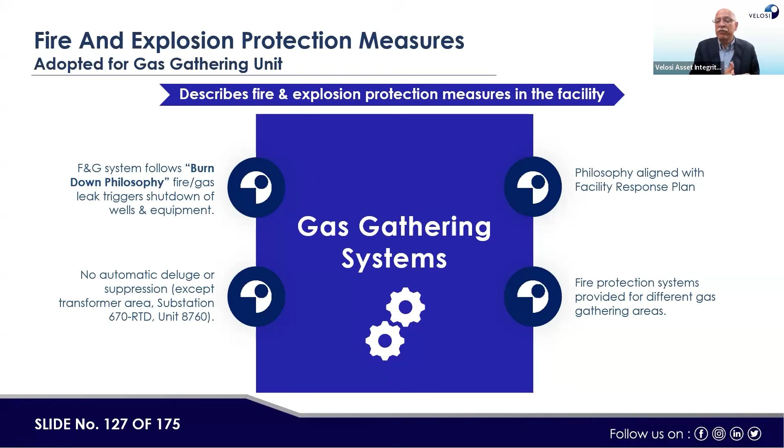If there is an automatic deluge system, fire suppression system, or there would be action by the operator. Then philosophy aligned with the facility, like a response plan, whatever modeling is being done, whether it's matching with the plant philosophy. Then fire protection system provided for different gas gathering areas. What kind of system is provided?

So then fire and explosion protection measures adopted for gas gathering, each area, how it is basically allocated, like area allocation, type of fire protection system, whether we have normal hydrants, sprinkler system, dual system, whether foam system is applicable. Then in the electrical installation or control rooms, what kind of CO2 system, FM 200 system, whatever system is being used, and whether it is automated or manual, all those aspects.

Then portables and support system, if there would be movable vehicles for firefighting system, and those are also available within a nearby facility. Or we can also take some help from the nearby civil defense system support as well.

Like time to fail. For example, what time is applicable, like a steel plate, how much time in case of jet fire, pool flame or heat effect, these kind of assets can sustain, we should know. For example, steel plate under jet flame, only 5 minutes. After 5 minutes, steel plate may fail.

Steel beam, 5 minutes. Jacket legs, 15 minutes. Riser pipe, riser process vessel, 5 minutes. In the jet fire, if jet flame is affecting, pool flame is like 10 minutes, 10 minutes, 30, 10, and 120. Whereas if the radiation effect is coming at 37.5 kilowatt per meter square, then 20, 60, 150, and 60.

So these are like, we know that this much time is available if any accident would occur, and that can affect these assets.

Then there are like explosion, the consequence result of overpressure explosion effect on gas facilities, are analyzed by considering the OGP 434-15 plant structure criteria as provided below. Like here, wood frame, trailer or shack, it can fail at 0.07 bar if the pressure is caused by the explosion. Similarly, reinforced concrete or masonry shear wall building, 0.28 bar pressure if caused by the overpressure.

Then steel or concrete frame, unreinforced masonry infill or cladding, this is the pressure bearing capacity. Like a complete frame may collapse if this pressure exceeds this number. So here, the second one, steel frame, metal siding pre-engineered building, the acceptable pressure should be below 0.10, otherwise it can collapse.

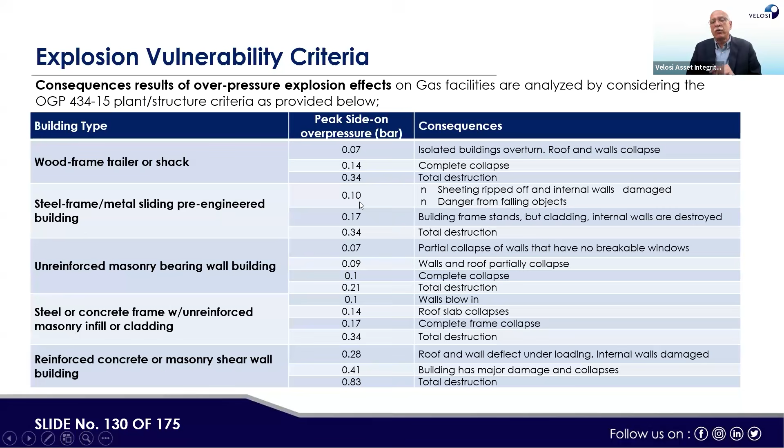Then the identified sensitive receptors in gas facilities are assessed for impairment frequency as provided in the below table. For example, residential building, accommodation building, industrial buildings, non-industrial buildings, critical structures, escape, evacuation, rescue measures, HSE critical equipment and system. Here, like for fire and explosion, the acceptable criteria, impairment criteria is 10 raised to the power minus 6, 10 raised to the power minus 5, both are same.

Similarly, for industrial building, 10 raised to the power minus 4, all within a large demonstration to 10 raised to the power minus 5, and 10 raised to the power minus 4 for explosion, and same, a large demonstration up to 10 raised to the power minus 5. This is the criteria, design accidental load impairment criteria.

Then receptor identified for FERA study, like unit area, these numbers are changed. And then the critical receptors, like these are the structures, including the equipment and wellhead facilities. Then primary structure of pig receivers, slug catchers, and other tag numbers are there. Then this tank, waste, otherwise like a waste drum storage area, admin building, and those.

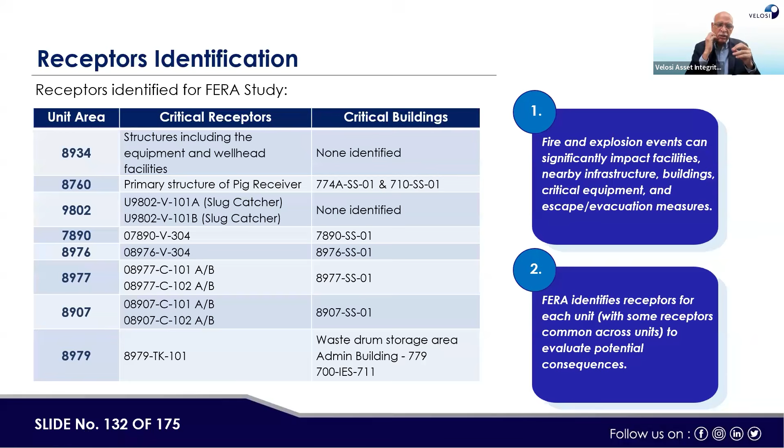So here, what we're trying to see, fire and explosion events can significantly impact facilities nearby, infrastructures, buildings, critical equipment, and escape and evacuation measures. Then FERA identifies receptors for each unit, with some receptors common across units to evaluate potential consequences. These are like more complicated. As we do that, then in the practical working, it can give more sense.

Then FERA modeling input, like when we are showing the software part a little bit: uploading of raster image of project specific layout of the facility and surrounding areas. Number two, define process material as per material composition from the heat and material balance sheet for all the isolatable sections. Place marking of isolatable sections in accordance with plant layout and locations, and activation of the fire safety specific model. Then parts count, failure frequency calculation, inventory calculation are provided as input. Then update weather parameters as per actual site conditions.

Here we define risk marking and measuring reporting points on the facility layout raster image. Marking of buildings and other key installations around the facility along with population density data. Marking of potential explosion sites on the facility layout drawing as per TNO GAME method and TNO color book methodology for congestion modeling - when congestion is more, overpressure would be more. Then define risk effect levels in accordance with applicable risk input impact criteria. Then insertion of project specific ignition sources on the layout drawing raster image.

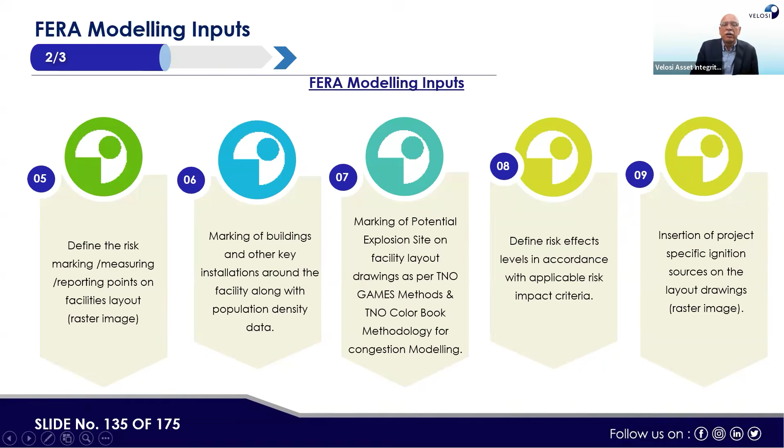So this way, the modeling in the software is done. Here next, points 10 and 11 are more about other model optimization actions as needed, and it's repeated. So we have to do some additional activities as we will be modeling the whole process plant into the FERA software or SAFETI software.

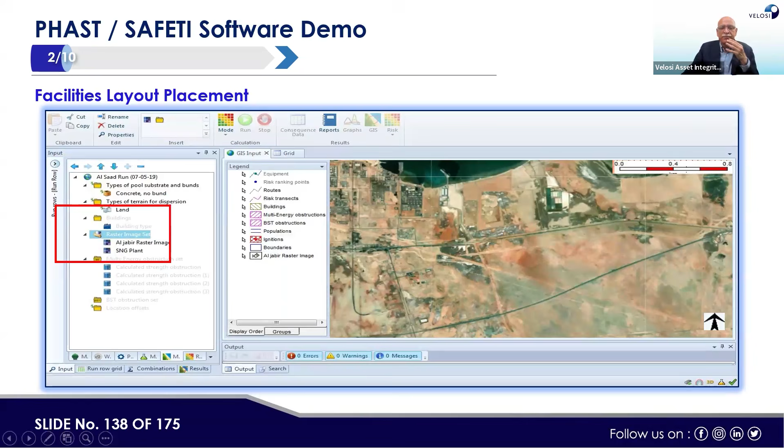Then next we try to bring in the raster image of the plant with a specific scale. If scale is not particular, it can show out of proportion results. Here the data is also changed. But for each isolatable section, there should be all its components and their leading composition, which would be modeled into the software. Then all the potential isolatable sections' placement and whatever is applicable are marked one by one. It is a big work.

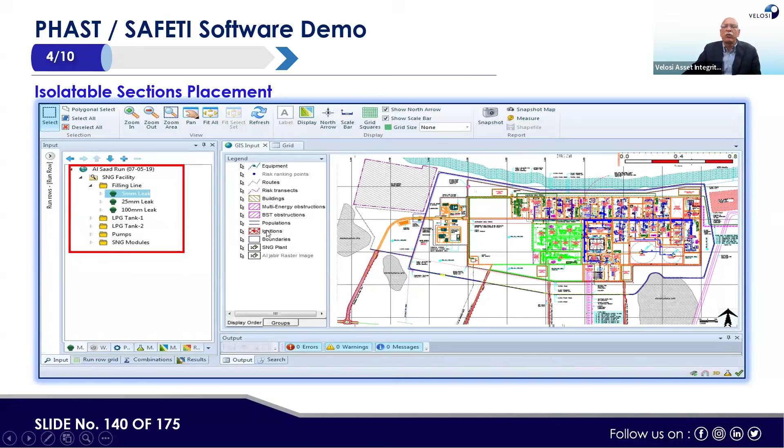Then insertion of ignition sources. If there is a potential ignition source like a heater or any hot spot, or any vehicle, or any electrical aspect like a substation, it can be shown as a potential ignition source in the facility.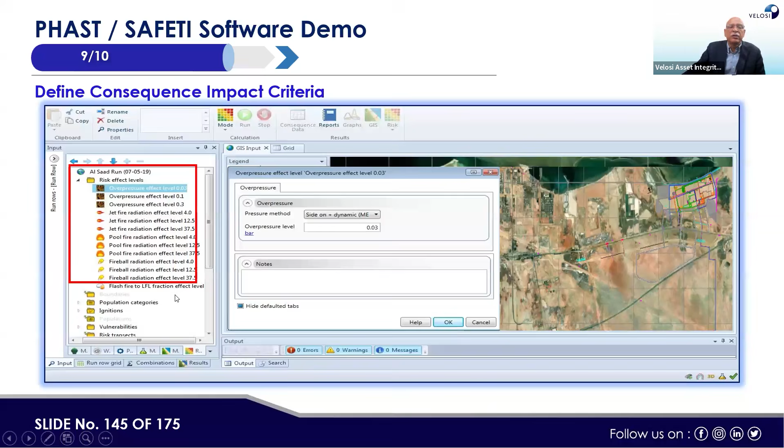Then define consequence impact criteria. So we define that criteria into the model as per the criteria defined earlier - these are the pool fire, jet fire, or flash fire.

So here the final model, when everything is ready, before we run the calculation button. If it's a full facility like a refinery, it can take days, but for a smaller facility, this calculation run can take a few hours. For big facilities it can take days because each isolatable section has to be calculated. Then first the consequence part, then the risk part, and then we see all the contours on the layout and the reports. Now these are FERA modeling outputs.

So Miss Harim Rao would be presenting it because she's a practitioner, so she can present better than me. She will present the FERA modeling output results, and then we will take the last question answers. I will come back.

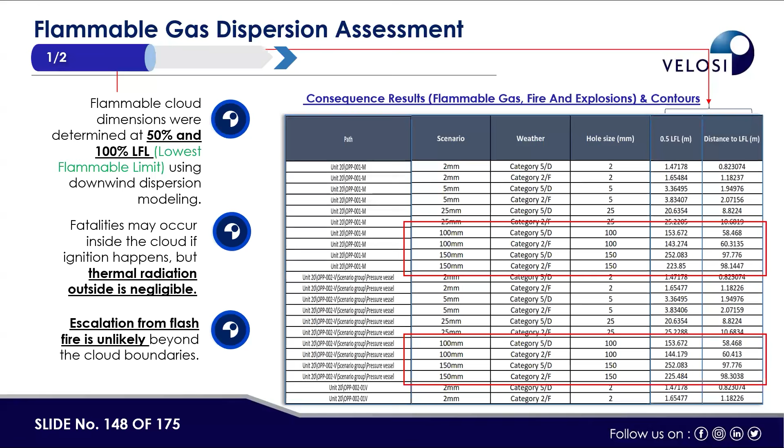Okay hi everyone, so over to the flammable gas dispersion assessment. This assessment is typically carried out for 0.5 LFL and 1, or 100% LFL. LFL essentially represents the minimum concentration of flammable gas in air that could ignite when in contact with potential ignition sources. 50% LFL is typically the safety threshold by regulations, representing half the concentration required for ignition. It shall be noted that within these flammable gas clouds, if they come into contact with ignition sources, fatalities may occur. Here, as we can see, this is the risk frequency contour for LFL, for flammable gas dispersion. As we can see, some areas are more susceptible to flammable gas dispersion and flash fire than others.

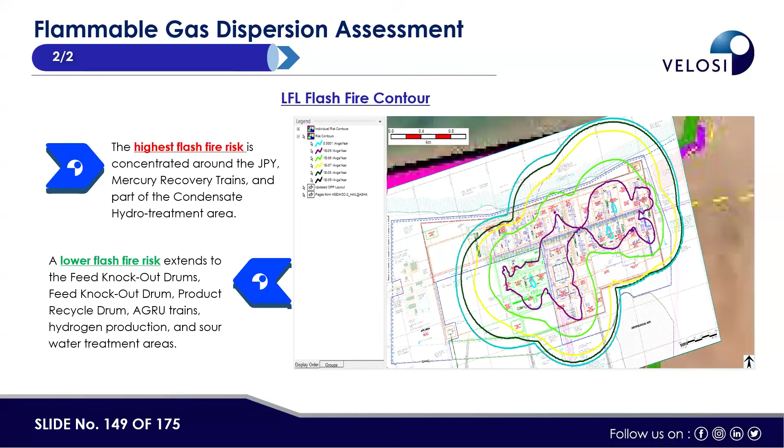So within the purple and light blue contour, the risk for flash fire is a lot more significant and higher than in other areas within the facility. I also wanted to point out that flash fires are predominantly short duration events that have an effect on personnel, and hence shall be assessed in greater detail in quantitative risk assessment studies as opposed to FERA.

Next, jet fire assessment. As part of the thermal radiation assessment in FERA, we'll also touch upon jet fire assessment. The intensity level of interest for this case study is 37.5 kilowatts per meter squared, assessed at a time of interest of 300 seconds, which represents the time to failure for steel equipment. As we can see, we have equipment potentially vulnerable to impact from a 37.5 jet fire at a risk level of 1e-5.

We've also performed a similar assessment for a risk level of 1e-4. Here's the overall frequency risk level contours overlaid on the plot plan of the facility. As anticipated, some areas of the facility are exposed to a higher level of risk than others.

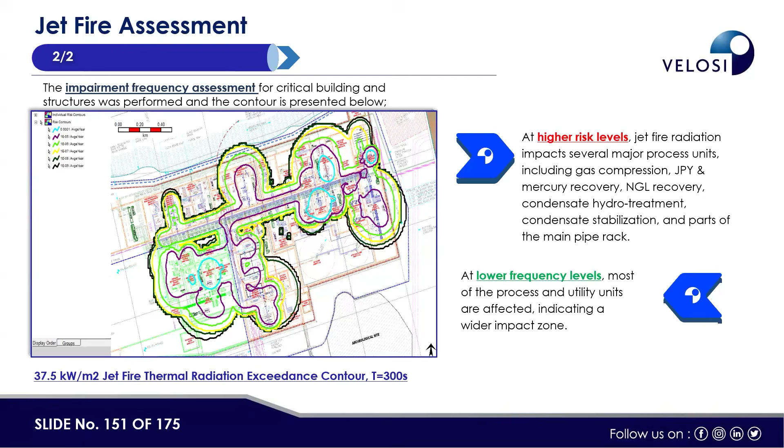In line with the DAL, design accidental load criteria for FERA, those areas of the plant exposed to a risk level of at least 1e-5 are considered intolerable risk, so risk reduction measures shall be brainstormed for those areas. Some risk reduction measures we would look at are PFP, passive fire protection, and similarly AFP, by ensuring adequate active fire protection is made available in these areas.

Similar to jet fire thermal radiation assessment, we also perform pool fire assessment, as it's applicable to our case study. The only difference between pool fire and jet fire assessment is that although the intensity level is the same, the time to failure is instead 600 seconds, or 10 minutes, for steel equipment potentially exposed to pool fire.

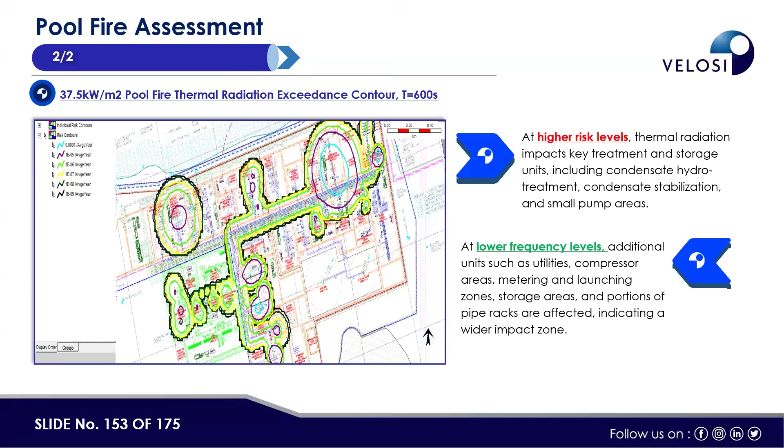As we just discussed, for those areas susceptible to pool fire impact at 1e-4 or 1e-5, recommendations for PFP, passive fire protection, shall be brainstormed and implemented in line with API 2218.

Next, over to vapor cloud explosion. VCE occurs when a flammable gas or vapor mixture ignites in a confined or obstructed area, producing high velocity flames and significant overpressure.

Typically, the TNO multi-energy model is utilized for VCE assessment. Low congestion has minimal impact, whereas high congestion increases overpressure, with distant effects converging.

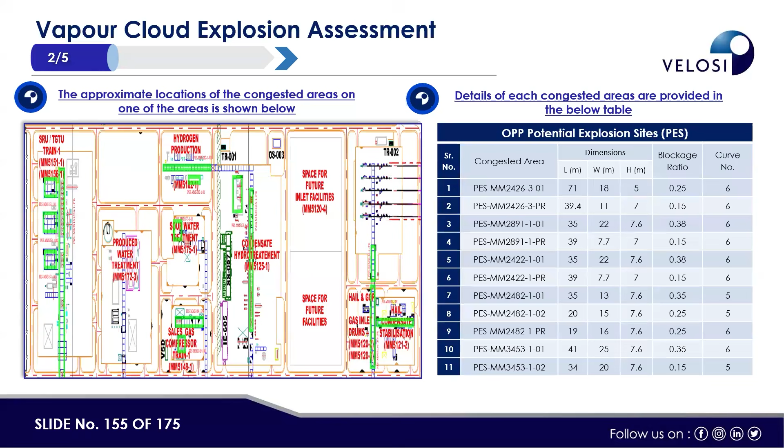These are some of the PES, or potential explosion sites, that we've identified for this case study. For each PES, we further identify their dimensions, area, and the volume of obstructions or obstacles within each PES. Accordingly, the VBR, or volume blockage ratio, is determined, and then the curve number is determined in line with the TNO Yellow Book. The curve number also takes into account factors such as parallel plane confinement and level of obstruction. Further details are provided in the TNO Yellow Book.

Here you can see the overall risk frequency contours for VCE. These are further quantified in the form of exceedance curves, as we'll see on the next slide.

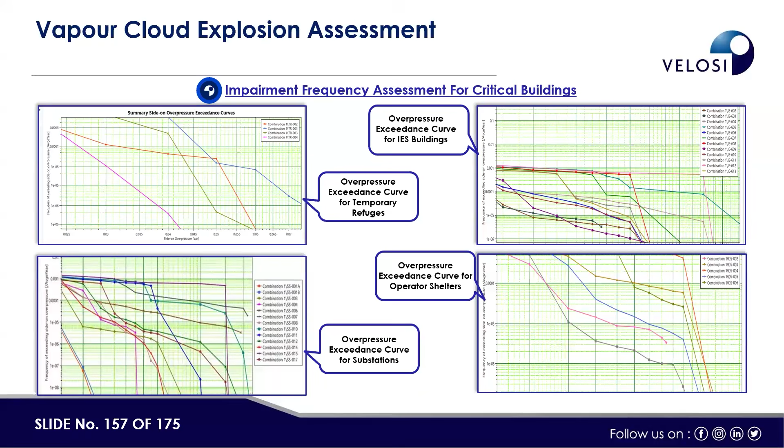These exceedance curves essentially tell us the level of overpressure at a defined receptor. For instance, if we look at temporary refuge number 2, for an overpressure level of 0.05, the associated level of risk is a little above 3e-5.

These exceedance graphs are further tabulated, as you can see. For instance, we've determined the level of overpressure at a risk frequency of 1e-5 at identified critical receptors for the facility, and we've also identified the impulse duration. These impulse durations are utilized to determine the blast overpressure requirements for buildings exposed to 1e-5 or 1e-4 level of risk as an outcome of potential VCE.

Next, over to escalation assessment. We also carry out escalation assessment for potential jet flame impingement, which is considered to occur for a heat flux of 250 kilowatts per meter squared, in line with OGP.

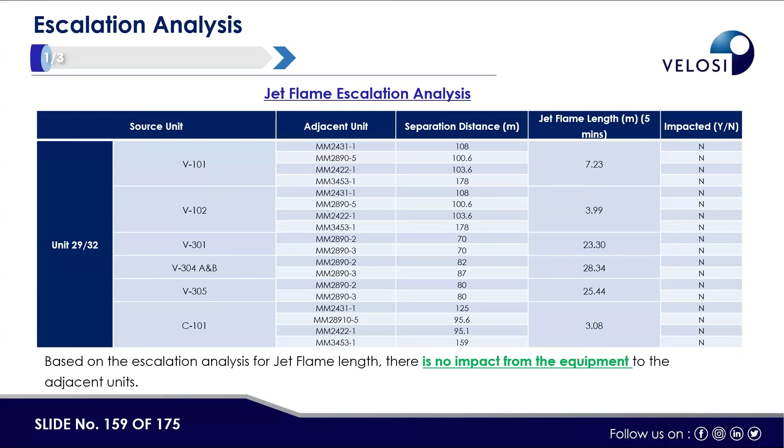So we identify those equipment that could potentially get impinged by this level of heat flux or by jet flame. As part of our case study, we identified equipment that could potentially get impacted by flame impingement. So essentially, for those equipment that are identified, we usually carry out assessment for BLEVE or boil over, if applicable.

Similar to jet fire escalation assessment, we also carry out pool fire escalation assessment. As per our case study, potential for escalation is negligible. So as we just discussed, potential failure events leading to escalation are identified using both consequence results as well as the site layouts. Equipment-specific barriers for prevention, detection, control, and mitigation are also reviewed, and recommendations are provided to reduce risk to levels as low as reasonably practicable.

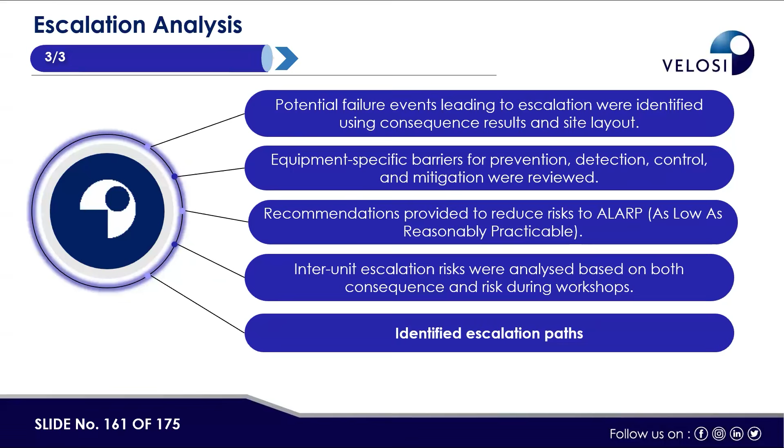So next, over to fire zones. Fire zones are used to check whether a credible fire scenario from the facility have any adverse impact on the neighboring units area, resulting in potential escalation of the event. The intent of fire zoning is to ensure adequate separation distances are maintained between adjacent units, such that a credible fire should not escalate to the adjacent unit.

So 3 criteria for determining fire zones are as follows: thermal radiation of 12.5 kilowatt per meter squared at t equal to 5 minutes; thermal radiation at 32 kilowatts per meter squared at t equal to 0 minutes; as well as explosion overpressure at 200 millibar for a risk level of 1e to the power minus 4. This assessment is carried out for whichever case is determined to be governing.

So as you can see here, the governing case appears to be 12.5 at t equal to 5 minutes for jet fire. And for pool fire, again, it appears to be 12.5 at t equal to 5 minutes. That appears to be the governing case for the fire zoning assessment. Based on this, we determine fire zones which the facility can be split into, and we also determine and verify the fire water demand for each fire zone.

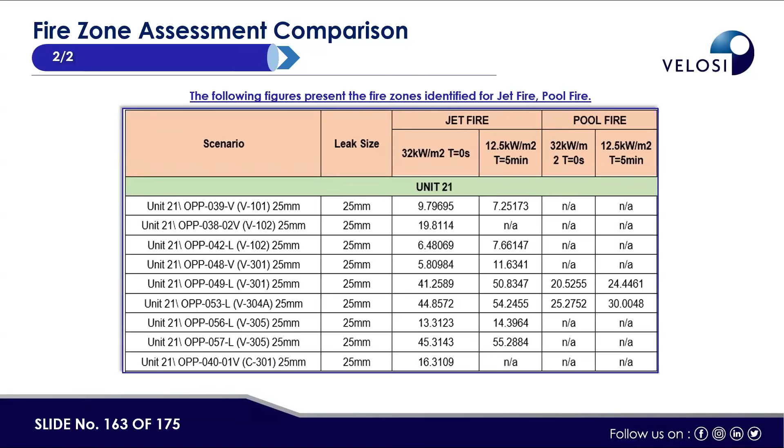Next, over to AFP review. So we also review the active fire protection for the facility. We identify deluge valves. In our case study, the OPP is equipped with standalone fire water systems with dedicated distribution to all fire zones. Automatic and remotely activated systems such as fire water, foam, clean agent, etc., are provided for all major fire hazards.

Non-process buildings use sprinklers, process areas use clean agents and extinguishers, and tanks have foam systems. So these are some examples of AFP that were utilized in our case study.

So it is not within the scope of FERA to essentially assess the vulnerability to AFP. These are assessed in a greater level of detail in the ESSA, which is the Emergency Systems Survivability Assessment. In the ESSA study, we identify vulnerability, redundancy, and fail-safe function for AFP systems, and we determine if this emergency system would be survivable in the event of an MAH.

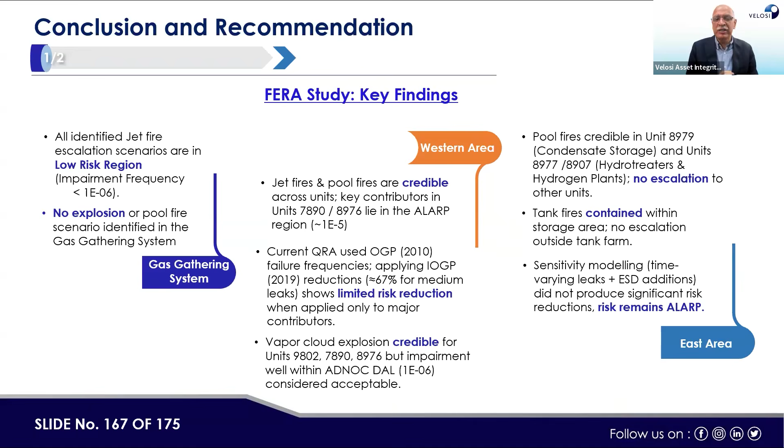And then there are some immediate recommendations and some long-term recommendations which have been given for the study. So leave that part, because this is like a recommendation as we make.

So now questions. Before the few questions, like which of the following scenario picture represents a vapor cloud explosion? There was a slide before showing 4 options: jet fire, pool fire, vapor cloud explosion, and dust explosion. So you have to identify which picture represents vapor cloud explosion. The answer is coming in - some right, some wrong, meaning not all right here, but mostly right. Some wrong are also there.

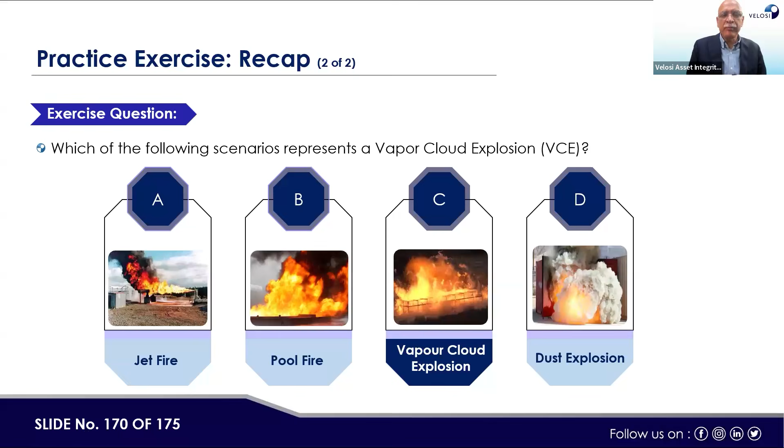The answer is C. If you see here, first one is jet fire, then this is the direction of the pool fire, and this is a vapor cloud explosion. We cannot decide - this is just imagination, right, but it's a combination. Practically, dust explosion was wrong, but the pool fire and the vapor cloud explosion pictures are nearby. Anyway, next question.

The result of FERA are mainly used for - this other question gives options: reduce operational cost, ensure safe facility layout and specify fire protection requirement, improve employees' performance, design HVAC system. So the answer is being given by participant, mostly right.

The answer is B, ensure safe facility layout and specify fire protection requirement.

Maybe the last question before we go to the open question answer session. Which of the following parameters is commonly used to evaluate thermal radiation impact from a fire? Kilowatt per meter square, dB, degree C per minute, or kg per second.

Mostly the answer is right, and the answer is kilowatt per meter square.